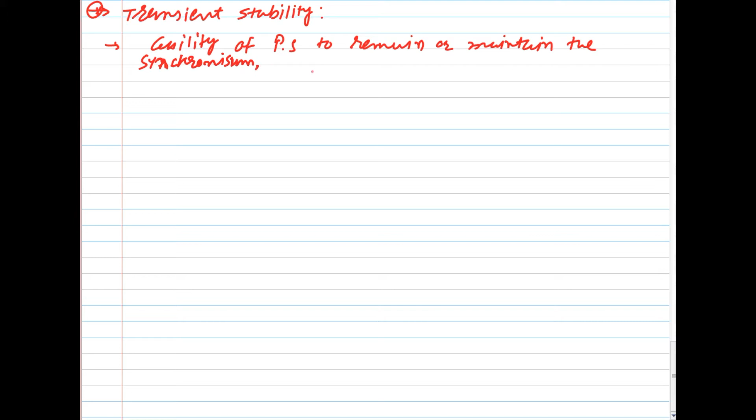The definition of transient stability is the same as we studied for power system stability; only a few words are changed. Transient stability is the ability of the power system to remain, or maintain, synchronism when it is subjected to a severe transient disturbance. Severe transient disturbance means a heavy or large disturbance.

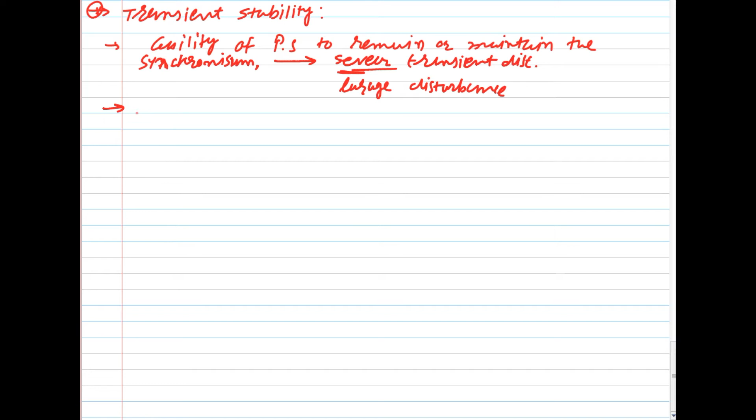So transient stability can be defined as the ability of the power system to maintain synchronism, or to remain in a normal or stable operating condition, after being subjected to a severe transient disturbance, or a large disturbance. The study period for transient stability is from a few cycles up to several seconds. Now let us discuss the factors affecting transient stability.

The first one is how heavily the generator is loaded. It depends on the loading of the generator. If the generator is fully loaded, delivering power at its maximum or rated capacity, or up to its spinning reserve capacity, then the generator is heavily loaded, and if a transient disturbance occurs in the system at that time, there is a chance of loss of synchronism of that generator.

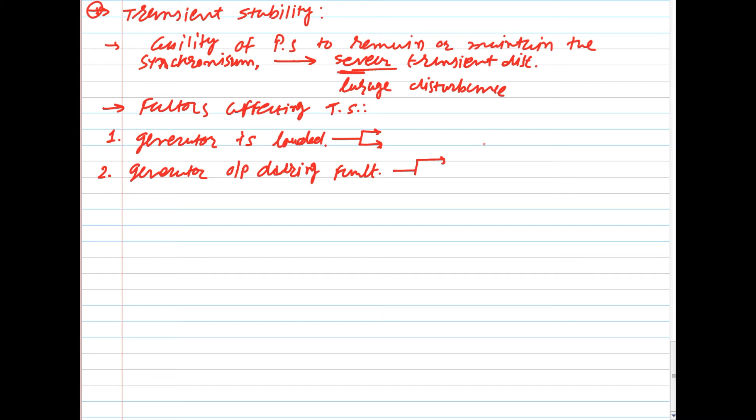So if the generator is heavily loaded, the chance of loss of synchronism under transient conditions is high. The second one is generator output during fault. This depends upon the location of the fault, and it also depends on the types of fault.

For generator output during fault, we will also see the case of a fault at the middle of the transmission line or at either end of the line, and during that discussion we will easily understand the effect of fault location on transient stability. The location of the fault, near the generator terminal or at the far load end, affects transient stability. Even the type of fault affects transient stability.

Whether it is a line to ground fault, a triple line to ground fault, any kind of fault affects the generator output during the fault, and can lead the generator to loss of synchronism under transient conditions. The third one is fault clearing time. We will calculate an example based on fault clearing time, which will give us an idea of how important the time factor is for clearing the fault.

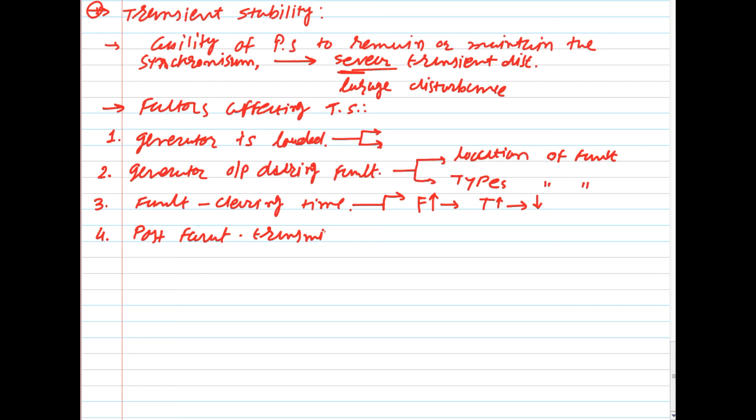And we will calculate an example based on that, which will clarify the effect of fault clearing time on transient stability. Next, the fourth one is post fault transmission system reactance.

That means after the fault clearance, the total transmission line reactance also affects the transient stability analysis. Just write down this equation that will help you to understand: EV by X sine delta. Clear? So if the reactance is decreased, the power transfer is increased, for the total reactance, that means the reactance of the machine and transmission line. So this is the effect of the post-fault transmission line reactance on transient stability. Clear?

The fifth one is generator reactance. Generator reactance has the same effect as transmission reactance. If the generator reactance is increased, the power transfer is decreased. Clear? Also, a lower value of reactance increases the peak power. Clear? If the reactance of this generator is reduced, then the power delivered by the generator is increased. So the peak power is increased.

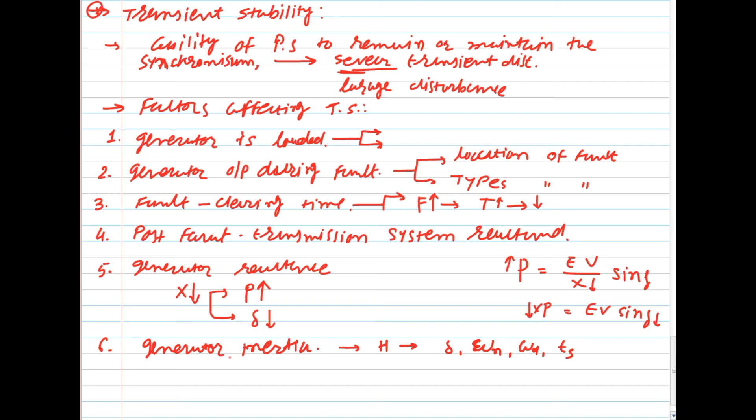Then the next one is generator inertia. Okay, so higher value of inertia: we have calculated the example, the effect of H on the power angle delta, omega n, omega d, and also on the settling time. So based on that conclusion, you can understand the effect of generator inertia for the transient stability analysis. Clear?

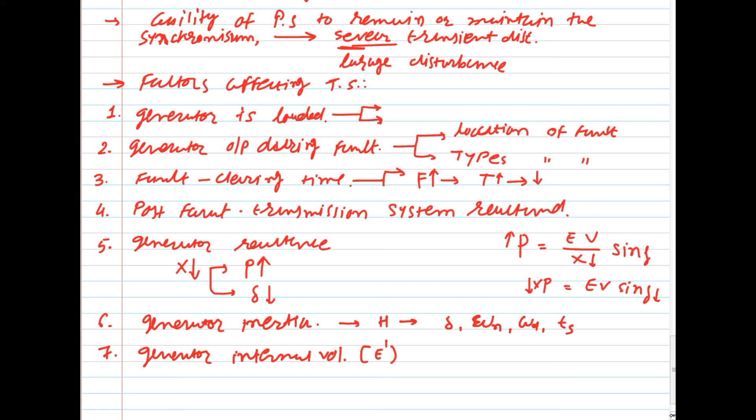Next, the seventh one is generator internal voltage, or we can say generator EMF, E, or for the transient condition we can consider it as E dash. So the generator internal voltage or generator EMF, E, depends on the excitation system. If the excitation is increased, then the generated EMF is increased, and based on that you can increase the generator terminal voltage V.

But look over here at the effect of E on power transfer from this equation. If E is increased, the power transfer is increased, or if it is decreased, the same way the power transfer by the generator is decreased. So this also affects the transient stability analysis. Clear? From this equation.

Next, the last one is infinite bus voltage magnitude, which is V. So again from this equation, for all these 4, 5, 6, 7 and 8 factors, you just need to remember this equation, which is P equal to EV by X sin delta. If this infinite bus voltage is reduced, then the power transfer is reduced, as from this power transfer equation both are directly proportional. Clear?

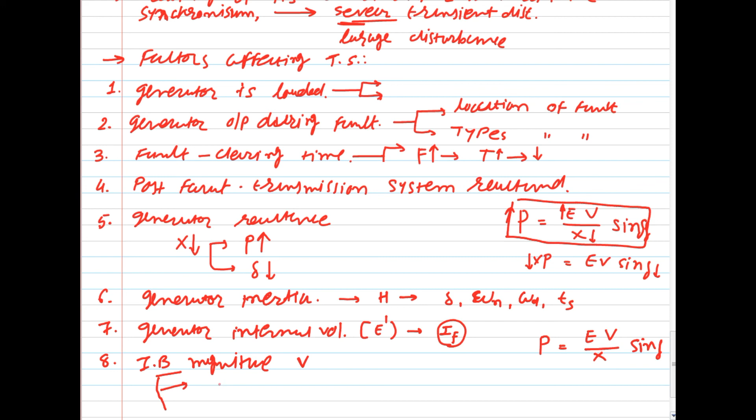But let me remind you again, what is an infinite bus? If the voltage magnitude and frequency are constant within acceptable limits, then it is known as an infinite bus. I hope you are clear up to this on all 8 parameters. Let us recall one by one again. Transient stability is the ability of a power system to maintain synchronism after being subjected to any severe or large disturbance. Clear?

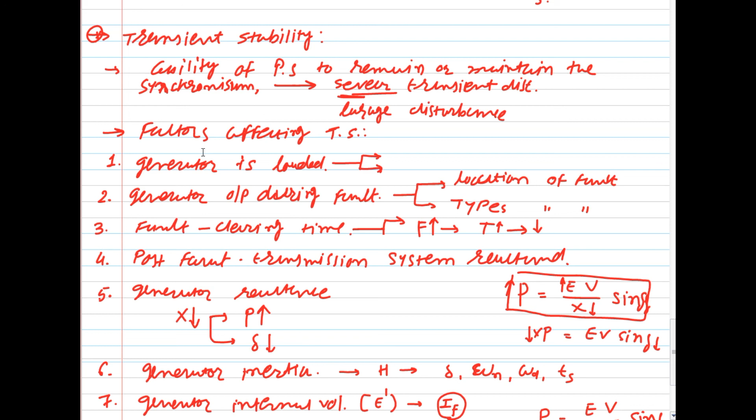Next is factors affecting transient stability. The first one is how heavily the generator is loaded. Second is output during the fault, which depends on the location of fault and types of fault. Next is fault clearing time. As it is improved, the chances of loss of synchronism are decreased. Post-fault transmission system reactance: after fault clearance, if the total transmission system reactance is decreased, then the power transfer is increased.

Then generator reactance. The same way from this equation, if X is decreased, the power transfer is increased and the angle delta is decreased. Next, generator inertia: just recall the conclusion, the effect of H on omega n, omega d, settling time and angle delta. And the generator internal voltage, or generated EMF, from this equation is directly proportional to P. If it increases or decreases, it directly affects the power delivered by the generator, and the same way for the infinite bus voltage magnitude.